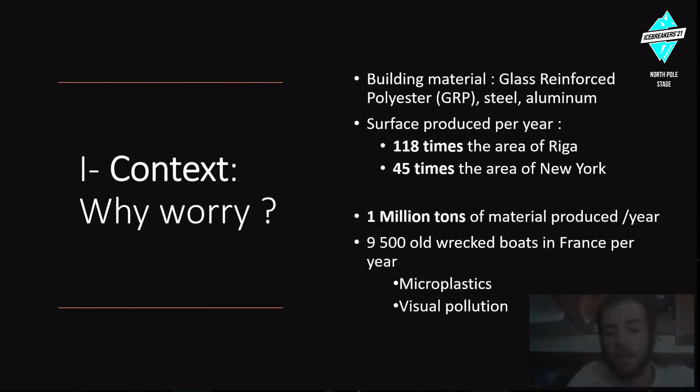So let's move on to what is worrying in 2021 in this sector, the ecological concerns. Indeed, this sector uses non-recyclable and non-biodegradable technologies such as glass-reinforced polyester, steel, aluminum, to get ideas fixed.

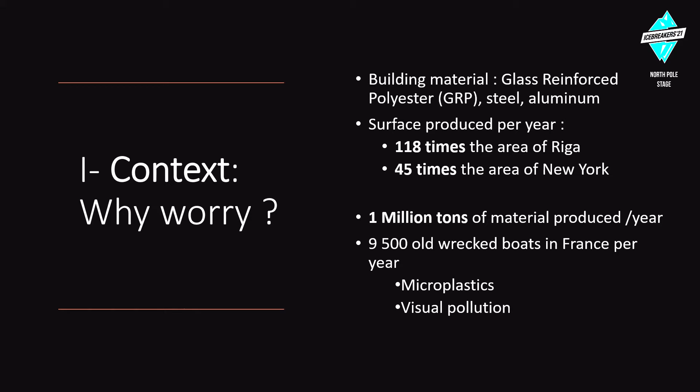You can tell yourself that with the amount of glass-reinforced polyester that is produced per year, just to build leisure boats throughout the whole world, you could cover the area of Riga more than 100 times each year. So it's like 45 times the area of New York as well, each year. So it's quite a lot of material produced - 1 million tons per year.

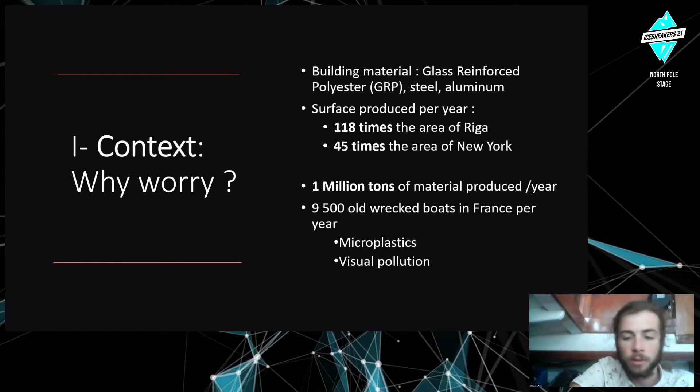The result of that is that in a few years, we might be confronted with a lot of those boats ending up as wrecks in rivers, on shores, throughout Europe. Like in France, it has already begun because the industry is quite old, and you have a bit less than 10,000 old wrecked boats that end up on the shores per year, and it ends up in microplastics, visual pollution, chemical pollution with anti-fouling paints, all sorts of pollution, like fluid pollution with the engine oils and all. So it needs to be taken care of.

So as I said previously, the problem with glass reinforced polyester, which is the main material we build those boats with currently, is that it's not recyclable, it's not biodegradable, it's completely sourced from petroleum, from oil, which is quite problematic now. Imagine you end up with no oil at all, which is not coming in the short future. But anyway, imagine you don't have any more oil - you can't build boats, you can't build anything in plastic actually.

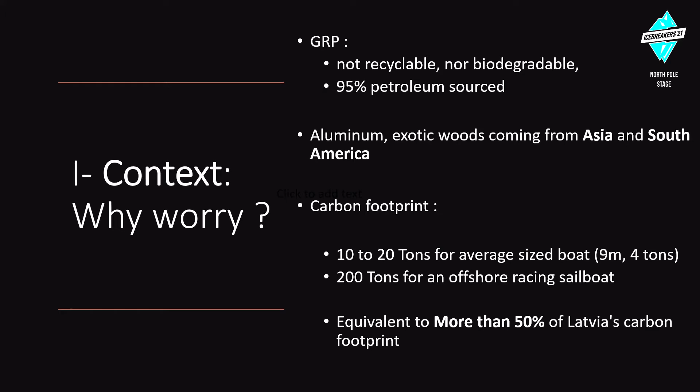So yeah, speaking about carbon footprint, it's 10 to 20 tons for an average size boat of 9 meters, 4 tons. And maybe you know about offshore racing, sailboats that go around the world, like the Vendée Globe or something - those races use boats that need 200 tons of carbon footprint per boat. So you might assume that sailing is clean because it uses a sail and the energy of the wind, but actually now there's a big paradox between this idea and the reality of an industry that pollutes quite a lot.

You can tell yourself that it's more than 50% of the carbon footprint of all the population of Latvia, only for this industry. So yeah, it really needs to be taken care of.

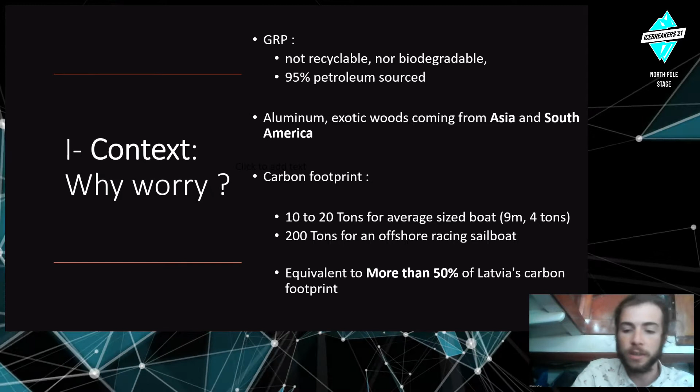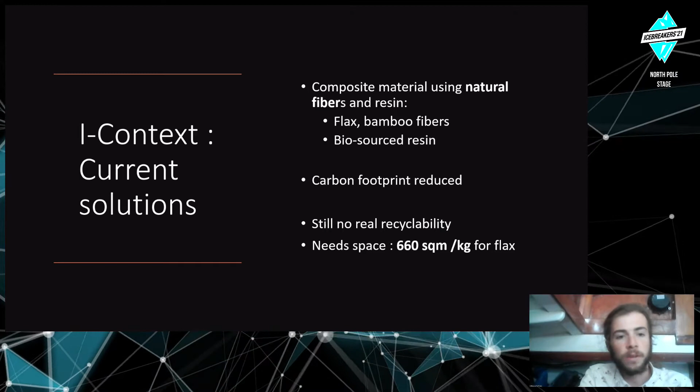Actually, getting plastic out of the ocean and recycling it is quite relevant in that situation.

It was made in Africa by traditional carpenters who used plastic instead of wood. They made molds of the wooden pieces and assembled a big, 7-ton boat out of plastic they found on the beaches. This boat is actually sailing, and they plan to make a bigger one. So making boats out of recycled thermoplastic from ocean pollution is quite relevant and possible.

The big advantage from an environmental point of view is that when you build a 1-ton boat, you get 1 ton of plastic out of the ocean, which is really interesting. You're not just minimizing your impact, you're actually making things better, which is one step ahead in ecology.

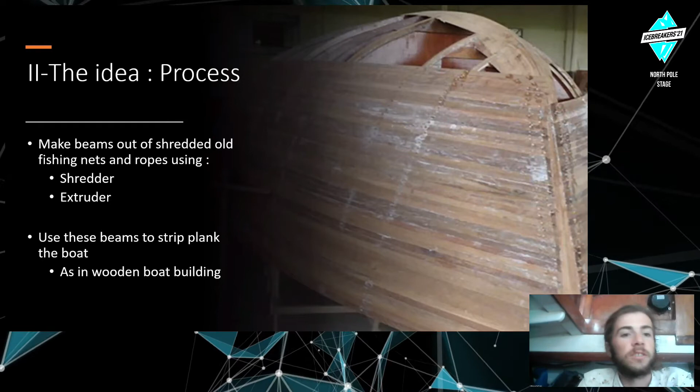So the process, what we plan to do, is make beams out of shredded old fishing nets and ropes using a shredder and extruder, and strip plank a boat as it's done in wooden boat construction. Very thin beams are glued together and assembled over a frame, a skeleton, to make a boat. So we might be able to do that out of old fishing nets and ropes, welding it all using heat guns and welders.

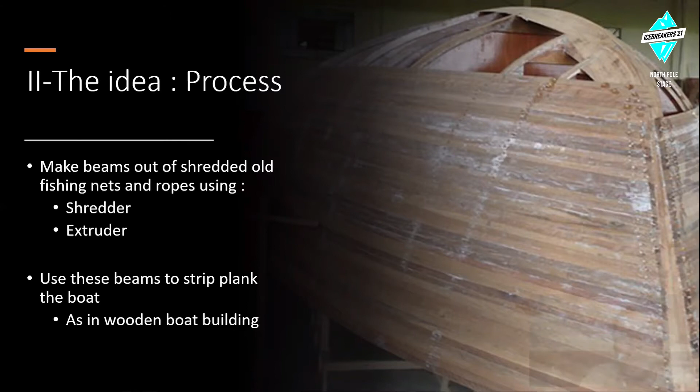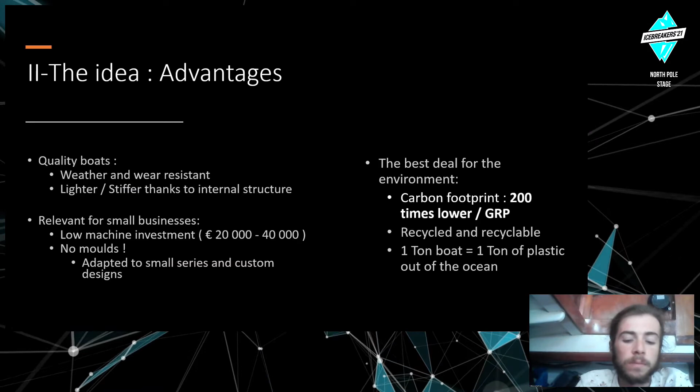This process has a lot of advantages. You can make quite quality boats that are weather and wear resistant, because the plastic we will use, fishing nets and ropes, are already good quality plastics made for hostile environments.

This process also uses an internal structure that isn't present in other kinds of thermoplastic boat building, like rotomolded boat building, where you don't have an internal structure, so the boat will be lighter. You could also see in the previous picture that there's no need for molds. Usually when you use thermoplastics you need molds, but with this process you don't need that.

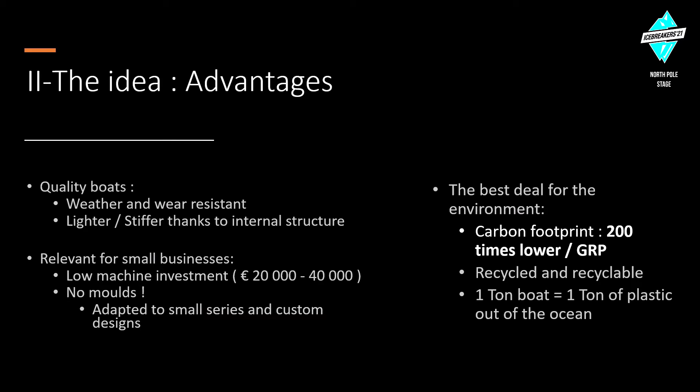So you can make small series and custom designs, and you have low machine investment, which is quite interesting.

So the work: we plan to develop low-tech efficient machines to go from the ropes to a plastic melt, then make beams out of it, then prototype it. Of course, we need to prototype the machines and make a prototype boat. This is what we plan to do in the future.

For that, we're working with Plastic at Bay, a startup company in Northwest Scotland that does really nice work on low-tech ocean plastic recycling machines. A lot of the work they do is completely open source.

So you can just go check on their website what they do. It's really interesting, they do a lot of work.

We share the whole development of machines, especially the dies, which is the piece that goes at the very end of the extruder to make the beams. We also got help from the business incubator at INSA Rennes in France, an engineering school that helps us with prototyping because they have machines to make prototypes. So we have those two partnerships.

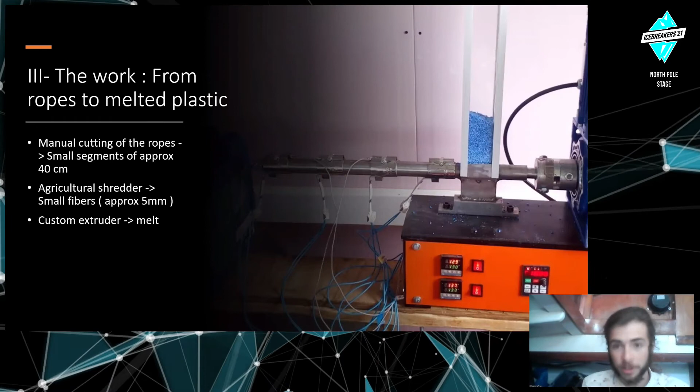Here you can see an extruder from Plastic Odyssey. It's this kind of machine that will allow for rope, for making beams out of ropes.

First you need to manually cut the ropes, which is quite a problem. In the future we'll need an automated way of doing that, but for now, for research and development purposes, it's just manual cutting. Then you shred them and use a custom extruder to get the melt, the melted plastic.

And then from the melt you need to make beams. How do you make beams? Without a mold, you need an extrusion die. What's difficult is you need even cooling, because the cooling is dynamic as opposed to in a mold, and so it needs complex and expensive simulation tools.

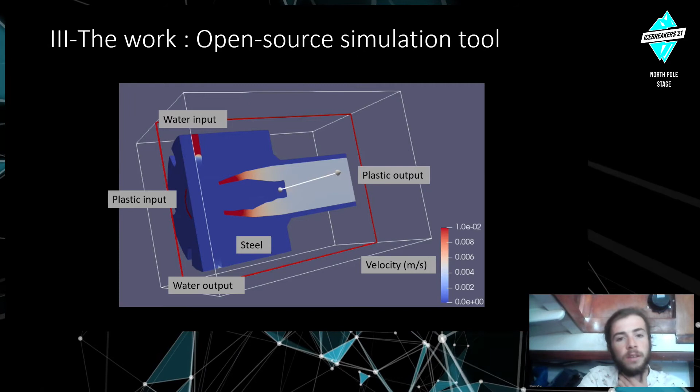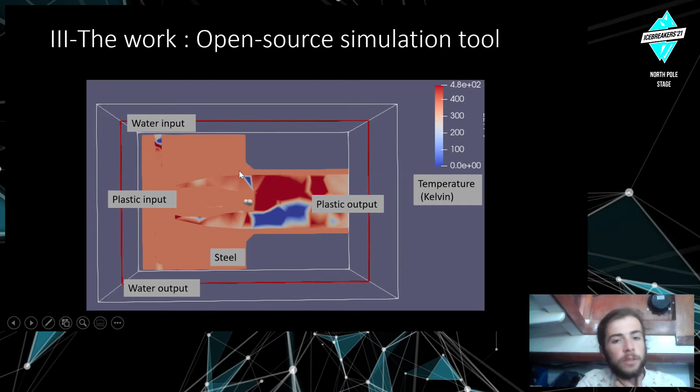For that purpose we developed our own open source simulation tool that allows for computing the fluid dynamics and thermics in the dies, the extrusion die, and potentially the whole machinery. This will be completely open source and released by January, so you'll have access to it if you want.

We'll discuss that later. So the work to be done in the future is prototyping a die adapted to boat building, because the ones we have now are dies used for other purposes like fence posts, and eventually pellets, and other kinds of industrial and agricultural purposes. So we need to make one adapted to boat building.

We also need to carry out extrusion tests, which are being carried out by Plastic Odyssey at the moment. They've just begun and it's really encouraging, this is looking quite good. The extruder prototypes are working quite well thanks to all the Plastic Odyssey work.

And then we'll need to make a prototype boat, which is a big step, the big step to show that the process is really worth it and really efficient.